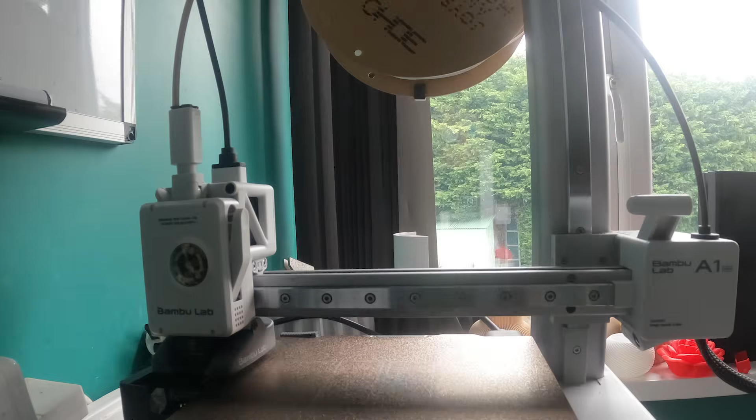In this week's video, I'll be showing you the exact design process to model a spiral vase for 3D printing in Fusion 360, and you can buy it if you don't want to make it yourself. Since I'm not here to waste your time, let's jump right in.

So this here is the model of my spiral vase, and there's a number of ways that you can go about creating a vase. I've seen people use the form function, but I'm not too familiar with that, so I opted for a parametric model that I can actually make changes to once the model has already been completed. So how did I go about actually creating this model?

If I turn on the sketches for you, you can actually see there's a number of sketches, 5 to be exact, all centralized among the same axis. On each of these sketches, I have a triangle on the end that I can change the position of using this dimension right here.

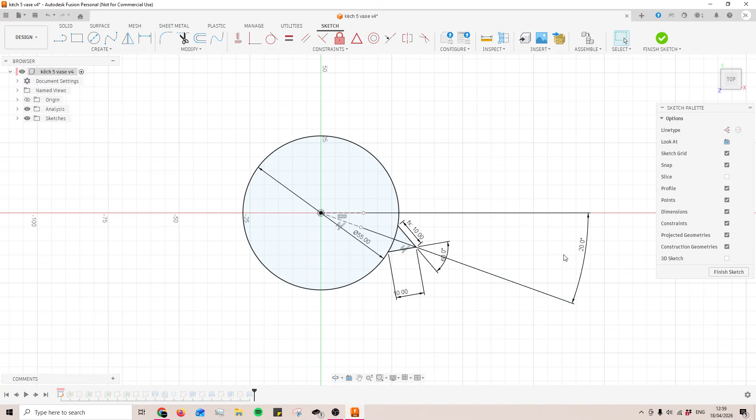With each of these sketches, if I just come back to the very start, so you'll see this is the very start of the model, and the next step was to simply create a plane. You create this plane however high up you want the next sketch to be, and then start your next sketch on it. You'll see with this next sketch, if I look at it directly from above, the circle is slightly larger, and the triangle on the side of it, the angle has actually been changed.

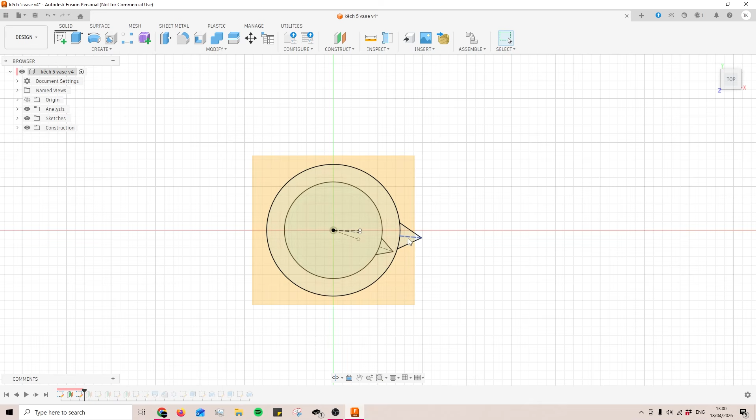That is because I'm going to be using a loft command, which will connect this triangle to the next, and because it's at a different angle, it's not going to travel straight up, it's going to create a free flowing pattern. And basically it is just this, and you repeat that a few times, creating another plane off the top of it, offsetting planes, and then adding sketches to them.

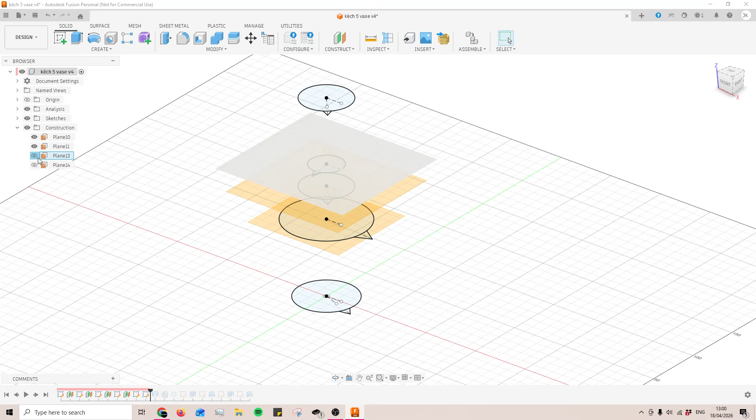And then once I have all of the planes and all the sketches in place, now it's time to use the loft command. As you can see, the loft swerves between each of the triangles quite smoothly.

And the reason that it is quite smooth is because if I check inside of this sketch right here, I've created a 3D sketch, and the way to turn on the 3D sketch is by clicking on this tick box in the bottom right once you have a sketch open.

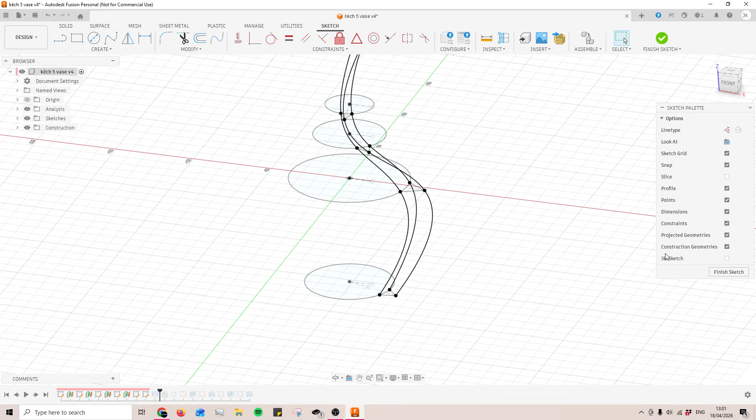And then I've used the spline tool, and we're just going to connect each of the triangle's corners for each of the 3 sides. Now I must note, it doesn't have to be a triangle, this can be whatever shape that you like, but just make sure that you've enabled these guide rails, because when it comes to using the loft function, you'll see that I have all of the profiles selected, and that is each one of these triangles.

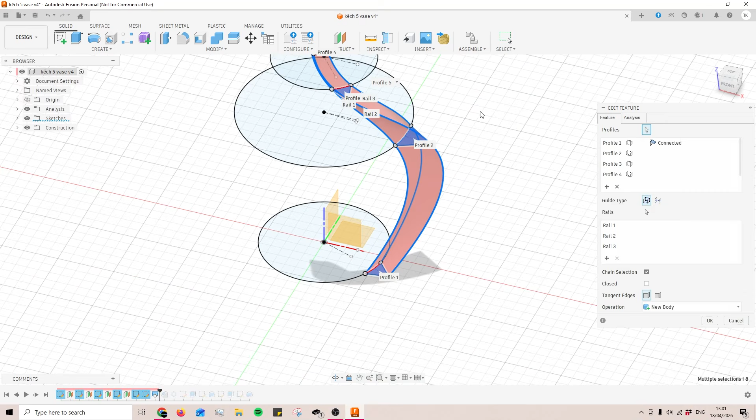And then the guide type is going to be the rails, and I've just selected each of the 3D sketch splines, and that ensures that the profile that we're creating perfectly matches up with the sketches we already have in place.

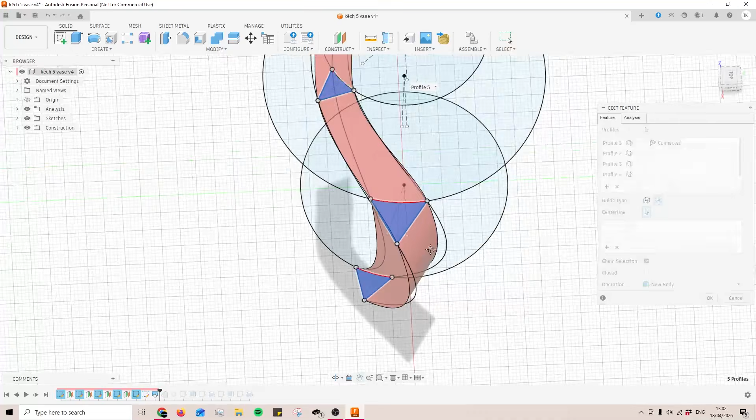And if I was to show you what it's like when we don't have the rails added, you see that the body that we're creating isn't quite so uniform, and also doesn't exactly follow the diameters of the sketches that we've created, and ultimately doesn't look very good once it's been completed. So ensure that you use those guidelines, and now what you'll have is just like a curvy line.

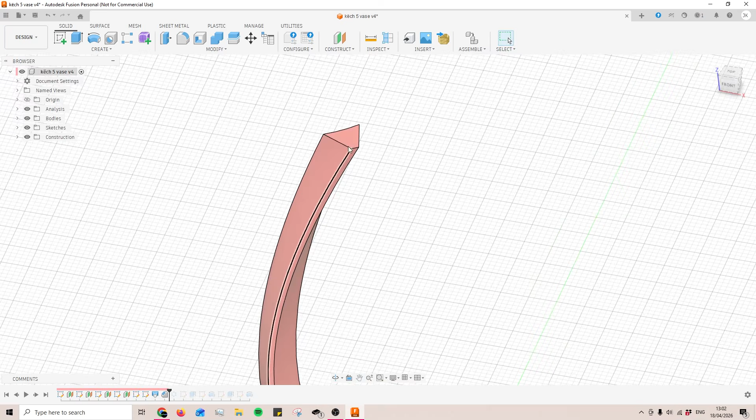And then what we want to do is make any amendments to this curved line. So what I did is I added a nice fillet on the end of it, or a chamfer even. So I added a chamfer to the end of it, and that just creates a nice face along the side of it and adds a little bit more depth and character to the model.

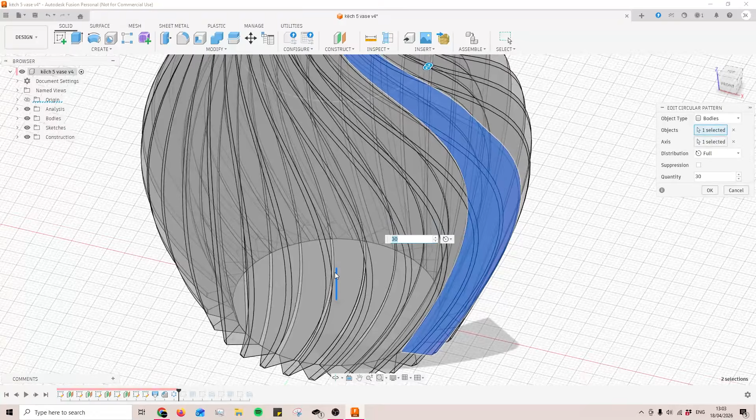And then we're going to be using the circular tool. What the circular tool does is you simply just highlight the body that you're looking to copy, and then you're going to select the axis using this selection box over here. I'm just going to select the origin axis, and then I'll create 30 bodies that spin around this original axis, and ends up leaving me with something a little bit like this.

Now at this point in time, I would love to tell you that the vase is completely finished, but if I bring out the section analysis tool and I start cutting through it, you'll notice that the wall thicknesses vary quite a lot, and in some places, depending on the design that you've decided to go for, you'll notice that the walls themselves can actually get quite thin.

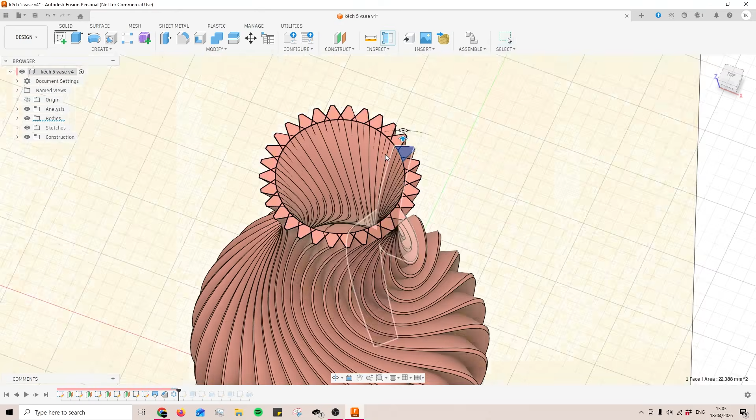So in order to make a vase that is actually watertight, we now need to create a body inside of this shell that we've created. The way I've done this is, first off, to add a bottom to it. I just created a sketch on the bottom and then made an extrusion.

Another thing I've done with this bottom is added a taper angle onto the extrusion. This made it so that rather than coming straight up, it comes out at 20 degrees, so I don't have an awkward gap at the bottom between the shell we've created and the base. That fills the gaps quite nicely.

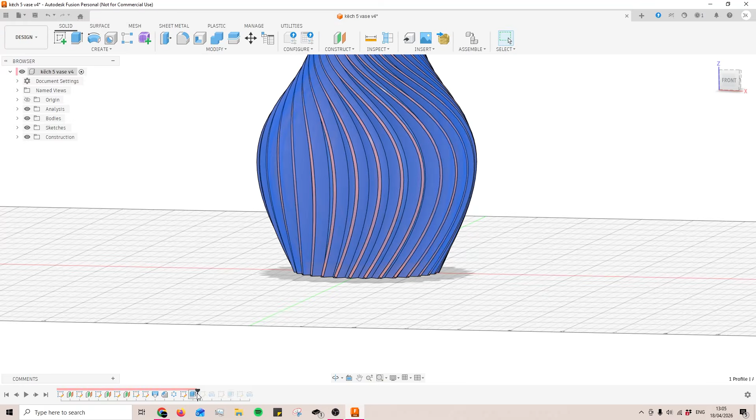Now it's time to add in the shell for the walls. If I open up this sketch, you'll see that when I was creating it, first off I used the section analysis tool just to cut it in half. I'll show you this.

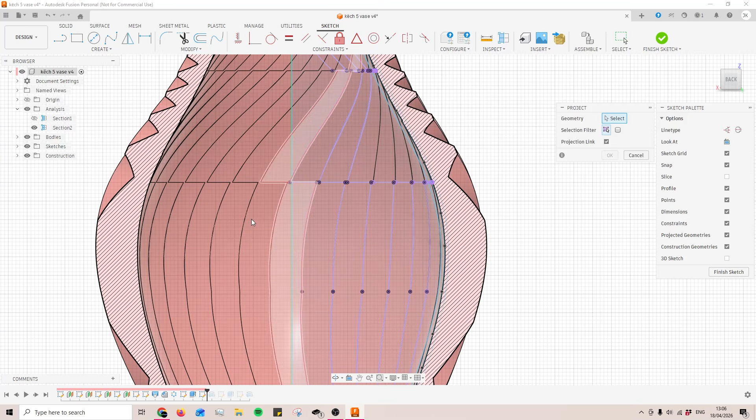Then what I did was project all of these bodies, so I press P and click on the faces I want to add to the sketch plane. I created this line, which is another spline, following the edge that was almost made for us when we used the circular pattern to create our shell. It doesn't have to be perfect, and as you can see, it's not. But we need to closely follow the line and create a smooth edge throughout all these jagged lines.

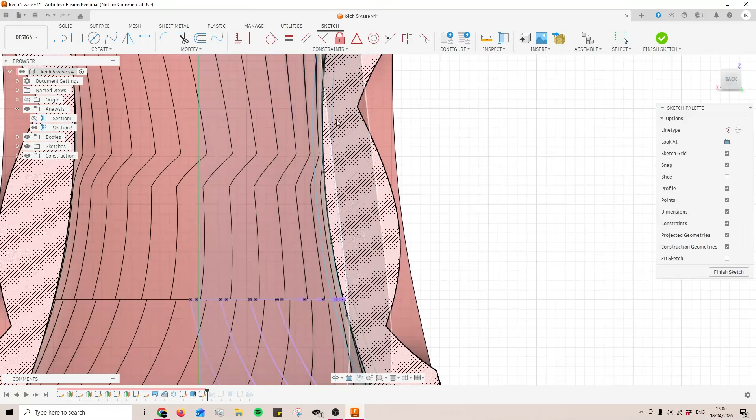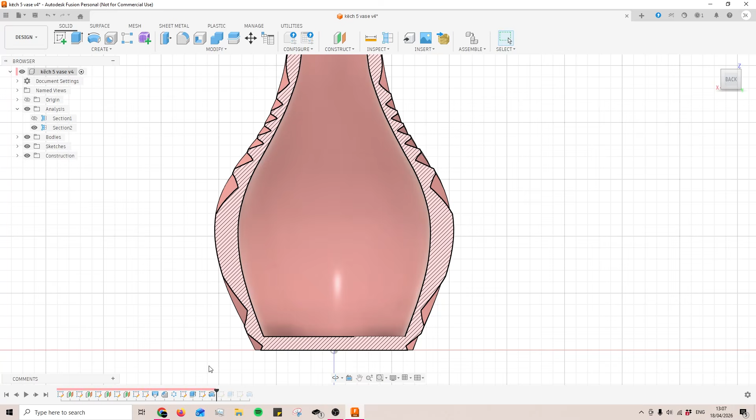After that, this shape and this shape are both just 1 or 2 mil offsets from that original center line. That allows us to add in a revolve. So I've revolved the faces I've shown you, around the center line I mentioned, as you can see right here. This has thickened up the wall.

As you can see, this is cut in half now, and the walls are a lot thicker, so they'll be watertight and actually hold water. With the vase designs I've 3D printed personally, I found they don't hold water, which kind of makes it useless when designing a vase. But if you wanted to put live flowers in here, you're going to want a thicker wall, and that's exactly what this revolve achieves.

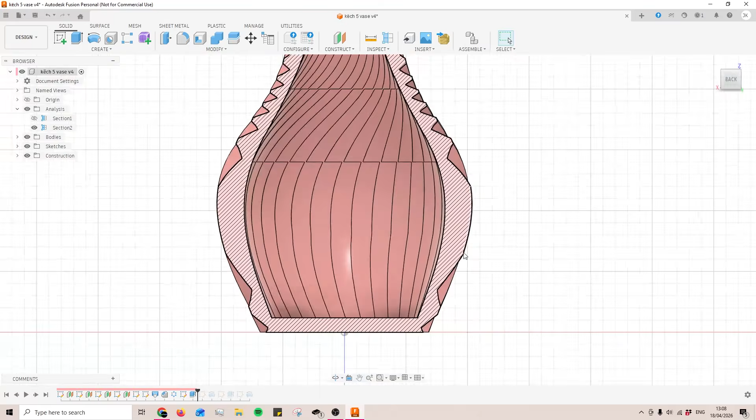Before shows this, and in this case there was already a decent wall thickness, but you may find that if you use a different design for your circular copy, you might end up with very thin walls, and that's why it's good practice to add a revolve here. It smooths out the inside and also allows us to create thicker walls if needed.

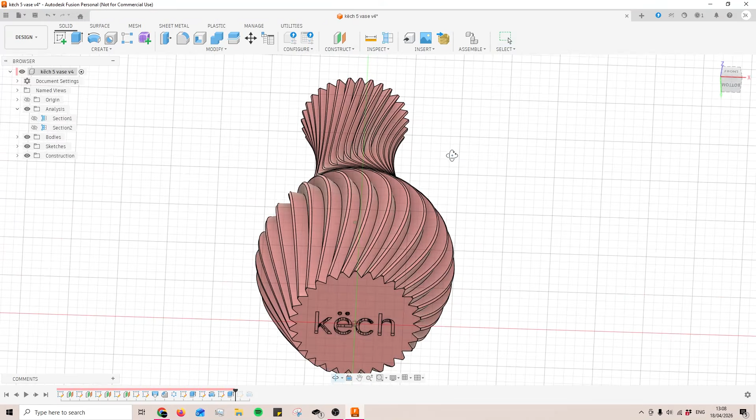Once I was done creating the vase, I added the branding to the bottom. This is my home decor brand, këch, and that was just a case of extruding up by 2 mil.

Lastly, what I did is use a revolve command just to chop off the end at the top here. Honestly, it's not necessary, but I know these ends are going to be slightly sharp, so I wanted to add a little bit of a feature and ensure it was maybe a little easier to handle.

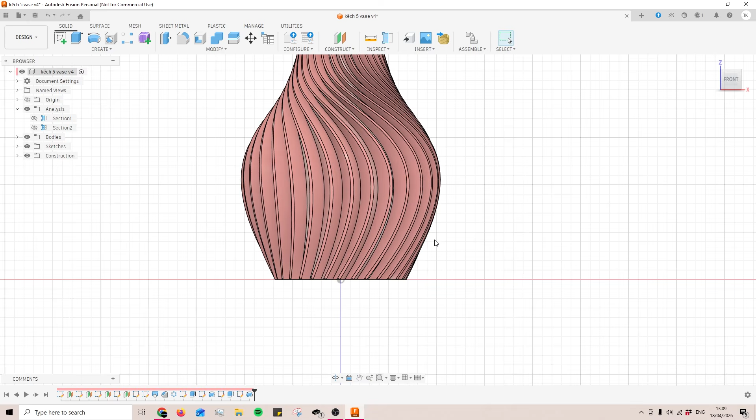Now, one thing I want to point out before you go off and design your own is that if you are going to 3D print this, you need to make sure there isn't an overhang. Most printers add supports to overhangs that are, I believe, at 60 degrees, and you do not want to be adding supports to your vases, especially if you're planning to 3D print and ship them off, because that means every time you get an order in, you're going to need to remove the supports. Not only is this a waste of filament, it's a waste of your time, and as I'm sure you know if you've 3D printed in the past, when you add supports you have to remove them, and it creates surface imperfections, which no customer's going to want.